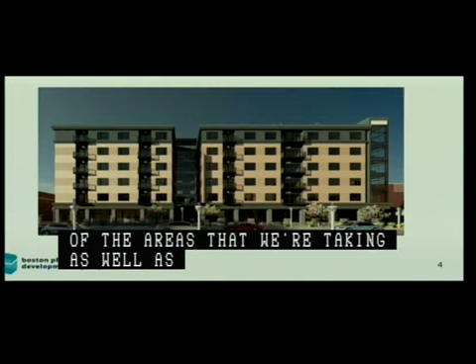Thank you. Okay, thank you, Michael. Are there any questions from the board?

There seemed to be a lot of opposition from nearby condo owners. Can you show us that building? I apologize, what building? There was a lot of opposition from next door condo owners, do you have that? Is that the wrong project? Oh, is that the wrong project? Okay, never mind. I'll ask that again later.

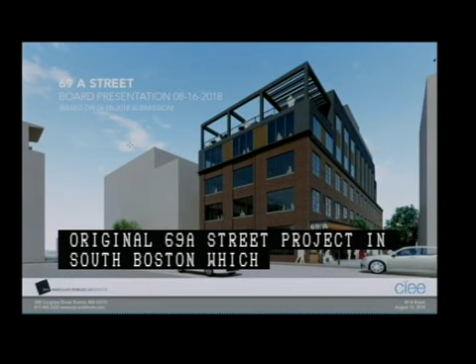The originally approved project consisted of the demolition of the existing two-story building in the rear of the project site and the renovation, expansion, and mixed-use conversion of the existing three-story brick and beam building fronting A Street. This renovation and expansion was set to include a three-story addition above the existing building and a six-story addition in the rear, for a total gross square footage of.

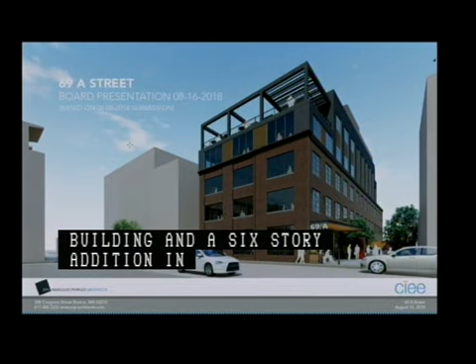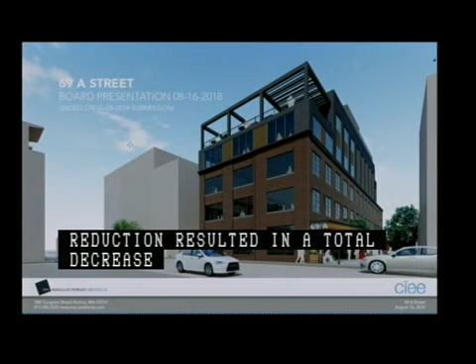78,700 square feet. The primary changes proposed to the originally approved project in the NPC submitted June 27th, 2018 include removal of the sixth story, resulting in a one-story reduction from the originally approved three-story addition, with a total corresponding height decrease from 66 feet 6 inches to 58 feet, as well as the removal of the originally approved rear addition to the existing 3-story building, which along with the height reduction resulted in a total decrease of 33,000 square feet, bringing the building total to approximately 45,700 square feet.

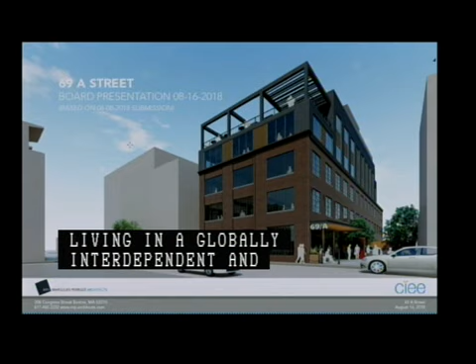The current proponent is CIEE, the Council on International Educational Exchange, and will serve as the Boston office for the nonprofit organization, whose mission is, quote, to help gain the understanding, acquire knowledge, and develop skills for living in a globally interdependent and culturally diverse world by bringing the world together through the most meaningful exchange programs available.

A public meeting was held at the Condon Community Center in South Boston and was supported by representatives from both the St. Vincent's and West Broadway neighborhood associations. We did receive some letters of concern from abutters at the recently constructed Port 45 building on 45 West 3rd Street, but given the reduction in height and square footage from the previous approval, this proposal would seem to be appropriate within the context of the neighborhood.

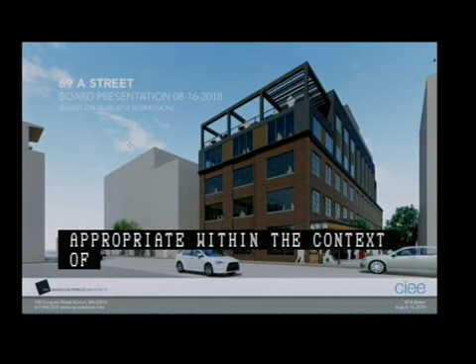I will now turn the presentation over to the development team, who can go through the specifics of the revised proposal, and then we'll be happy to answer any questions. Okay, thank you, Gary.

Good afternoon, Mr. Chairman, members of the board, Madam Secretary, Director Golden. Attorney Joe Hanley, McDermott, Quilty, and Miller. With me on behalf of the development team is Nate Turner, who is the project architect with Margulies Peruzzi Architects. He'll take you through the final design here.

In summary, we are here representing CIEE, who is the end user and is looking to open their Boston headquarters at this location. This is the former Standard Rivet Company industrial building in South Boston, and my client purchased the development rights as approved, and essentially what you have is an approved project that's been redesigned with a lower building height, without a rear addition, and with the same amount of parking.

What was it originally approved for? The original approval was for a 3-story addition and to take the rear of the building with a rear extension that was also the similar height. So we're foregoing the extension at the back and just renovating the existing building with a 2-story addition.

But is the use being changed, the use of the building? Use is the same.

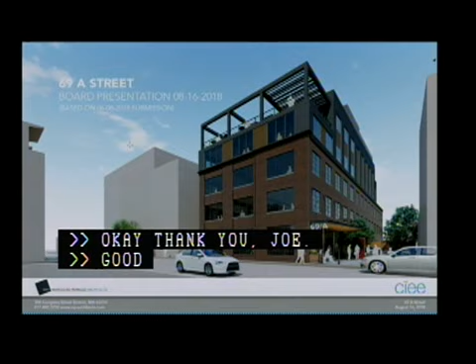Good afternoon, everyone. Here you're seeing the street view from A Street looking towards the building. You'll see replacement windows and a roof terrace in the front. We're maintaining the facade proportions along the front but trying to tuck back the terrace. On the right-hand side at street level, there's a more inviting entryway on the side of the building, pulling visitors and building occupants in off the sidewalk.

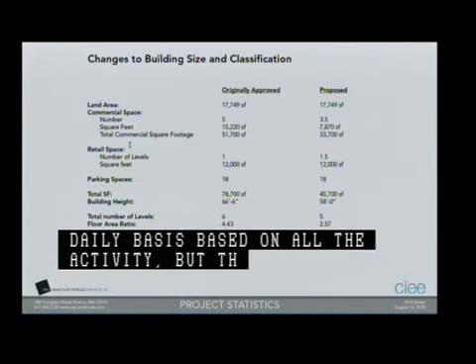Here's a comparison slide showing the statistics involved with the original submission compared to what we're proposing on the right-hand side. You'll see that pretty much all of our numbers are less than the previous submission in terms of height and square footage.

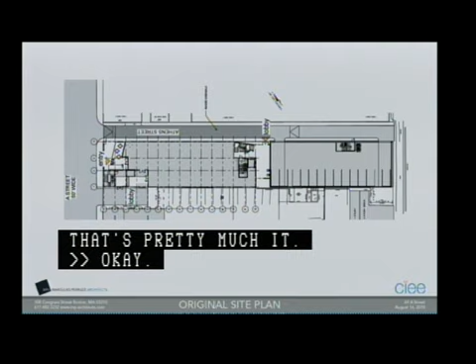Are there any questions from the board? So there seemed to be a lot of opposition from the nearby condo owners. Can you talk about that, please? Yeah, it's interesting. Thank you.

The comments you received are maybe predicated on this being another bite at the apple on concern about height and density of a project that's already been approved and is in fact now being reduced from what was approved in height. These are residents from 45 West 3rd, which was approved for development by this board with lots of interest from the abutters. Many of the folks on that IAG supported this development in 2016 because of the office use and the way the development was presented at that time.

We certainly appreciate the new residents who have since bought in that condominium project after we were approved, and we're happy to work with them in any way. But what you have before you, and in your supportive comments for this hearing, are letters of support from both the St. Vincent Neighborhood Association and the West Broadway Neighborhood Association, both for the lower end in this area. That opposition is sort of limited to something that came before them. But having said that, we're always happy to work with our neighbors.

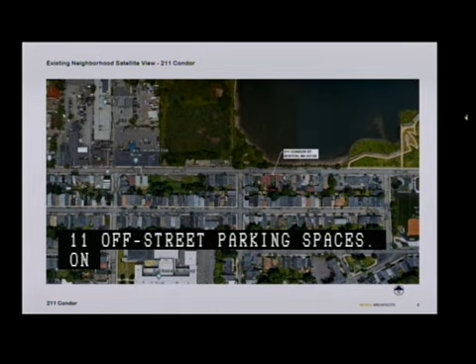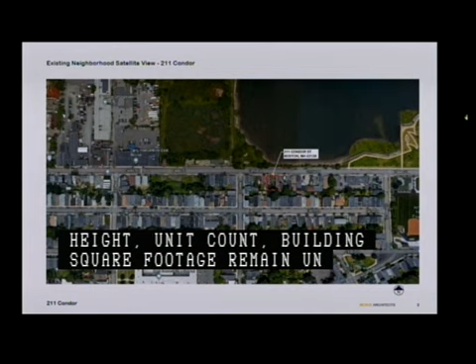The building at 211 Condor Street was most recently revised and approved by this board in January 2018 as a 4-story residential building with 12 residential units and 11 off-street parking spaces. On March 6, 2018, 211 Condor Street LLC acquired the property from Boston Real Estate Capital, the original proponent, and on June 26, 2018 submitted a revised plan to the BPDA seeking to redesign the exterior facade and reduce the off-street parking by 1 space. All other aspects of the project, including building height, unit count, and building square footage, remain unchanged.

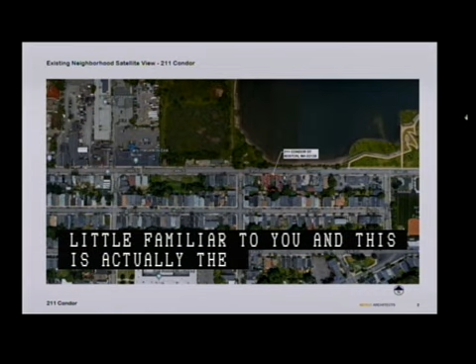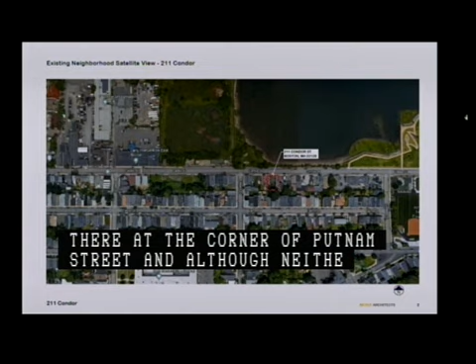This project probably feels a little familiar to you—this is actually the 4th time we've been before you on what started as a relatively simple project, but because of its location, here's that 7-acre parcel you were considering earlier. 211, which we're here on today, is here. The other component of this project is 187 Condor, at the corner of Putnam Street. Although neither building independently would have been subject to small project review, the BPDA requested that my client voluntarily submit to small project review because of all the other things happening on Condor Street, so they did.

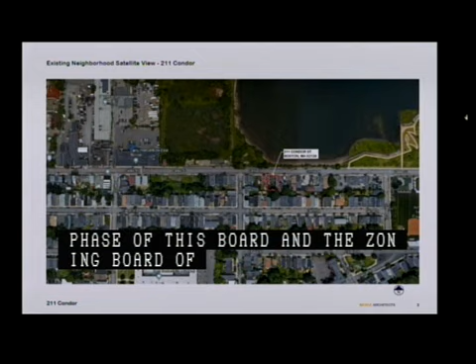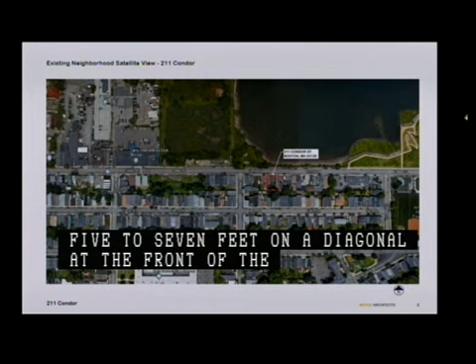After this board's original approval in June of 2017, 211 Condor Street was the subject of the first notice of project change. After the initial approval at this board and the Zoning Board of Appeal, it was discovered that the zoning subdistrict line running down Condor Street was not coextensive with the Chapter 91 Tidelands line, which cuts across the front of some buildings on Condor Street. So we appeared before you in January of this year seeking a reduction of 5 to 7 feet on a diagonal at the front of the building to comply with Chapter 91 and set aside that space as either open space or marine water-dependent use. Because we're across the street from the Chelsea River, we're not able to do a water-dependent use, so the front of the building would be open space. As a result of that 5 to 7 foot reduction on the front of the building, we lost 2 units and 1,600 square feet of space.

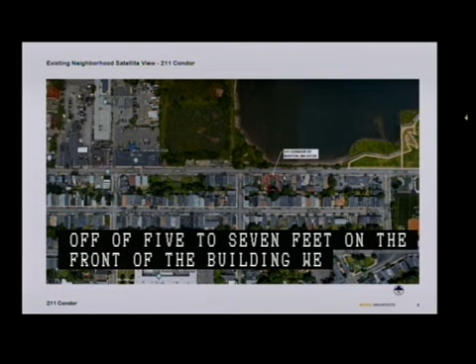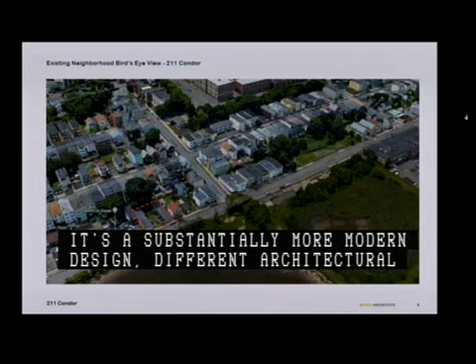Rather than just shoehorn the original design into the building as cut off, the new owner of the project, Wonder Group, decided to redesign both 187 Condor Street and 211 Condor Street. We appeared before you earlier this year on a complete redesign of 187 Condor Street, which you approved. It's a substantially more modern design, different architectural firm, different concept, and different idea of taking in the views of the Chelsea River across the street. So similarly, today before you is solely a consideration of revised design for this project.

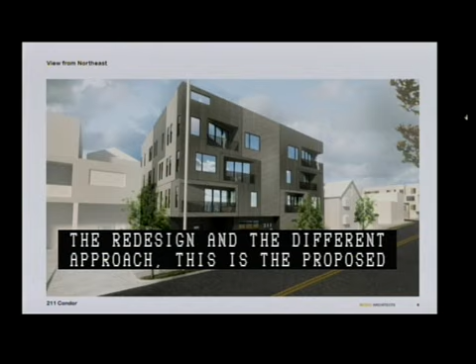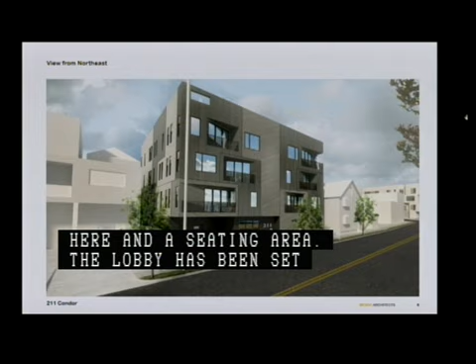Significantly, the architect has added outdoor balconies for each of the front units, creating usable open space for all residents at the front of the building and activating it, making it more lively along Condor Street. As a result of the reduction on the diagonal, we've picked up some nice open space in the front where there'll be a planter and a seating area. The lobby has been set back for the residential entrance, and there is the entrance to the parking garage, which has space for 10 vehicles. Also, the top floor has 4 units, each with a small roof deck for more usable open space.

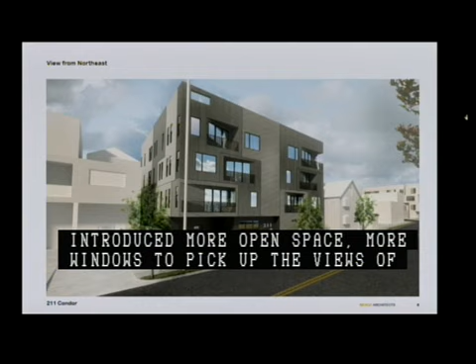So we've introduced more open space, more windows to pick up the views of the Chelsea River across the street, and softer building materials in response to comments we heard from the neighborhood when we redesigned 187 Condor Street. They wanted to see more traditional materials, so we've added wood to the front of the building, in addition to the glass.

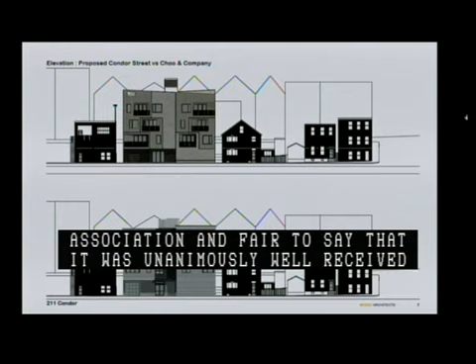We had a community meeting sponsored by the BPDA. We met with the Eagle Hill Civic Association, and it's fair to say it was unanimously well received. The architect has taken the original massing of the building, which was 3 bays across the front, and essentially replicated the same massing, same height, same building envelope—but for the reduction at the front—introducing a much more contemporary design.

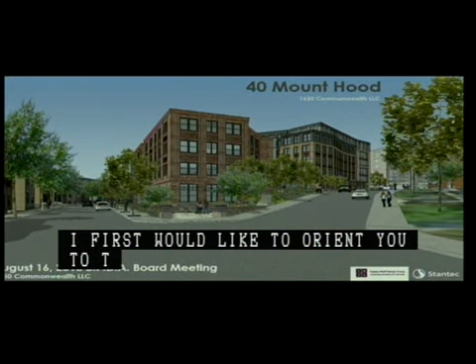Thank you, Mr. Chairman, members of the board, Madam Secretary. I'd first like to orient you to the project's location. Cleveland Circle is in this direction, downtown, and Packard's Corner is in this direction. The site is here. It is currently the Boston Hotel, formerly the Best Western Hotel. Those of you who know it are familiar that it also is in proximity to the Green Line that runs along Commonwealth Avenue.

Off of the project site location, off of Mount Hood Road, the project consists of approximately 165,310 gross square feet of a combined 4 to 6 story residential building constructed on a podium, containing up to 151 condominium units and 204 parking spaces — just for the record, I think your paper had 201, but it's 204, you'll see that in the plan. The proposed project unit mix consists of 6 studios, 88 one-bedrooms, 41 two-bedrooms, and 16 three-bedrooms. Of the 16 three-bedrooms, 10 of them are townhouses.

BPDA staff recommends that the board take the following actions: authorize the director to issue a scoping determination waiving further review, authorize the director to issue a certification of compliance, authorize the director to enter and execute a cooperation agreement, a Boston Residents Construction Employment Plan, a community benefits agreement, and an affordable housing IDP affordable housing agreement, and any other agreements needed for this project.

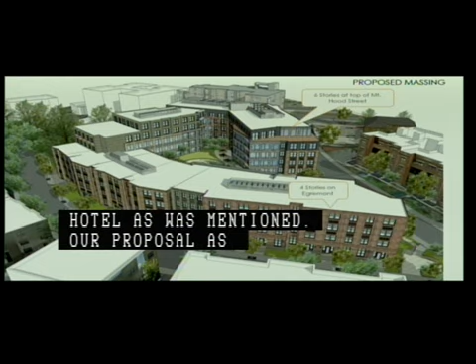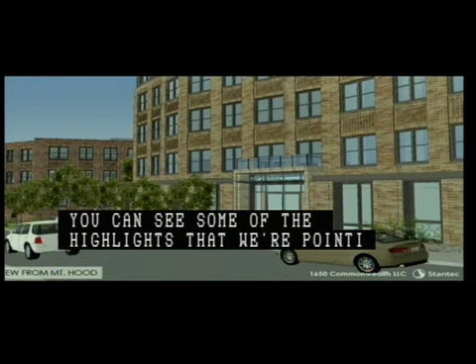Our proposal is, as was said, 150 for-sale housing units with 24 IDP units, which is 16%. As you can see, we worked hard with both the BCDC and the Aberdeen Architectural Historic Commission to design a building that fits into the community. You can see some of the highlights here - down at the street level, a highly detailed brick building with some diversity in the colors that we picked up from neighborhood precedents. This is the corner of Mount Hood and Egremont.

That's it - any questions, please? Okay, thank you. Are there any questions from the board?

Can you just go back to the slide that showed the different amenities around the building and just talk through them? Sure. So I'll point out something about each slide.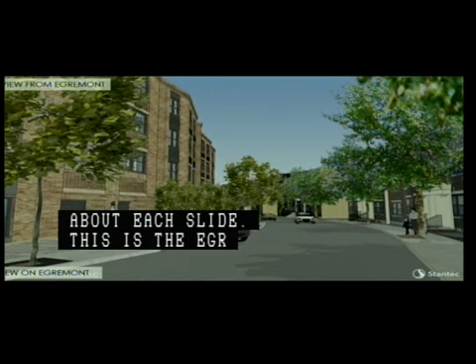This is the Egremont side, and this is the entrance to the lower level of the parking structure. These units above are what I would call the liner units. So this is the entirety of what you can see from the street in terms of the garage. That's an amenity - using the facade of the buildings to block the view of the garage so we don't see it from the neighborhood. As we go back - oops, sorry, I'm going the wrong direction, excuse me.

These are stoops along Egremont to try to make it a nice neighborhood feel. If I were to show you a picture of the other side of the street, you would see stoops up into walk-up buildings similar to this. So there you go, you see it on that side and you see the stoops.

As we move back up, you can see the topography in this building, and how we've stepped the massing down the hill. This amenity here, there's a doorway into that glassy part between those two buildings. The developer has said to the community that they will allow the community to potentially use that space for community meetings from time to time, coordinated with the property manager. This is the entrance along Mount Hood, which would enter into the lobby and other amenity spaces there.

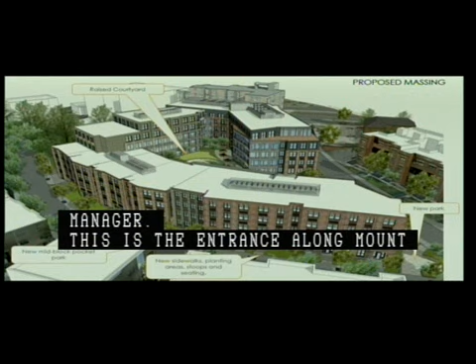And then that's the overall. Does that answer your question? Yes, thank you. Thank you.

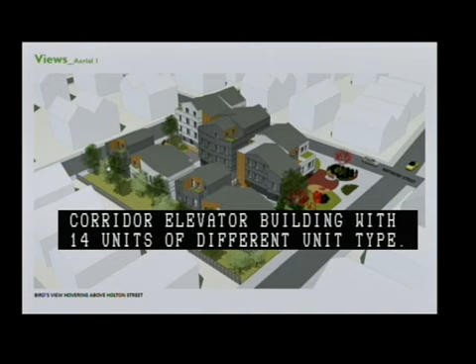This is an aerial view of the project. It basically comprises 3 building clusters. The main building is a double-loaded corridor elevator building with 14 units of different unit types, as well as 2 carriage houses along Litchfield Street for neighbors. The parking is tucked under the building overhang, so it's hidden away from public view. There's a generous buffer zone between the neighbors, as well as a publicly accessible pocket park at the corner of Holton and Antwerp Street.

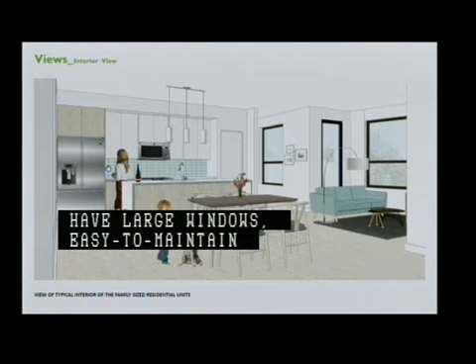The units will have large windows, easy to maintain flooring, fresh air through the ERV system, as well as a large kitchen for the family-sized units, as well as other sustainable features.

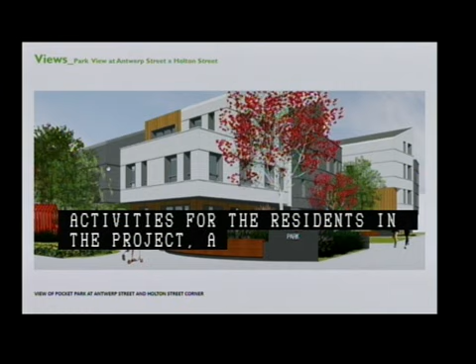The jewel of the project is the pocket park. It will be publicly accessible with design features like a play sculpture, seating areas, and a sun lawn. We envision that as a passive-use pocket park that will activate neighborly activities for the residents in the project, as well as the surrounding streets. The surrounding community can use it for Saturday yoga or Tai Chi lessons, summer cookouts, group or senior dancing lessons, or just a simple picnic with family and friends.

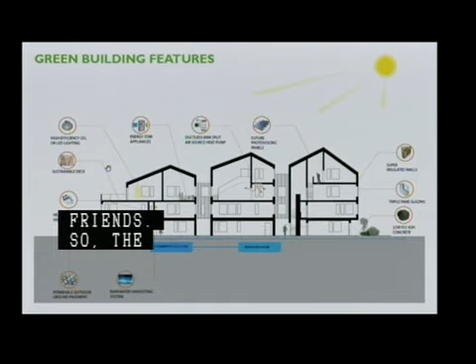The project will also be pursuing LEED Gold certifiable status, as well as a robust building envelope, efficient HVAC units, future PV panels, and other sustainable features. And that's the project. Thank you.

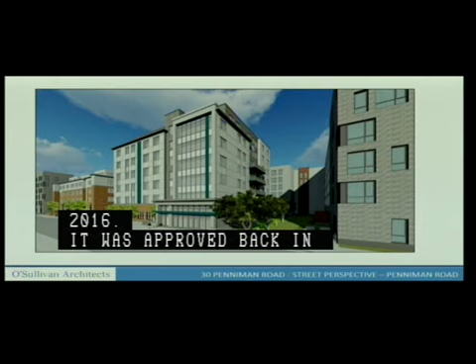Right next to the proposed building is a 36-unit residential condominium building. Construction on that started in 2016. It was approved back in 2008 and then purchased by my client from a prior developer. And those units, all but I think 2, have been put under agreement, and we're at CO at the moment. So not only are we working with Michaels, but my client also has new residents who were literally next door.

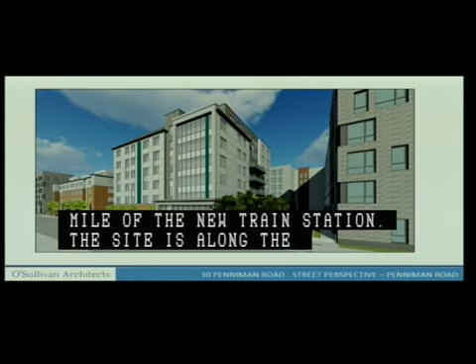So the opportunity here is, what's new, obviously, is Boston Landing, and we are right at the foot of Boston Landing within a quarter mile of the new train station. The site is along the Pike and between Cambridge Street and the Mass Pike beneath Union Square. And as Gary indicated, this is a further introduction of home ownership, which we are excited to provide and to add to what we've already started, and most importantly, to be part of an overall plan with the Michaels Company.

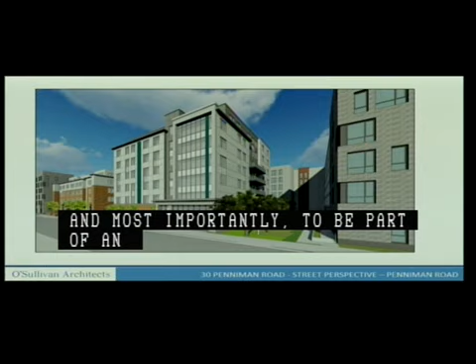This site itself includes a derelict building, which is there now, which has been essentially condemned by order of ISD and has been unoccupied by that order for some time. And so my client is coming in as the new owner developer of that with Michaels to provide much needed home ownership in a neighborhood that, as you know, has a disparity of rental to home ownership.

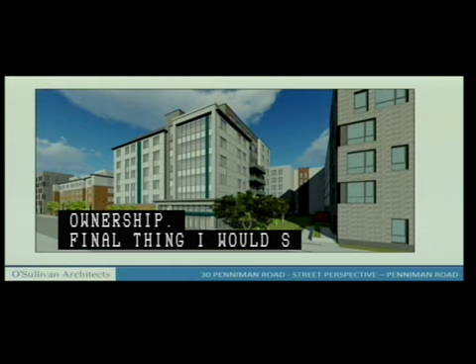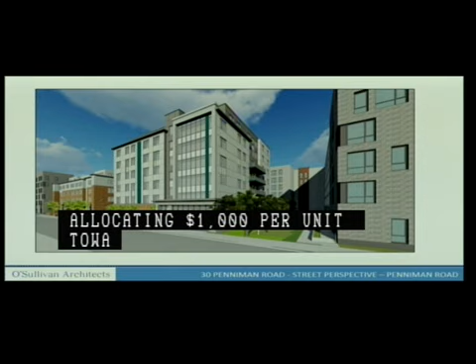Final thing I'll say, we have worked very hard to be stewards of the park. There's a small, not a pocket park, but it's sort of a pocket park. It's got a community garden and some basketball courts and a small pocket park area directly across the street, which we adopted on the first development. And you'll see in the board memo, this project is allocating $1,000 per unit towards that park for maintenance and upkeep. And that is on top of a few of the other developments in the area, as well as with the Michaels Company. So we see this as very much an opportunity to reconnect or connect this part of the neighborhood, which perhaps hasn't been readily available to folks, and then tie into the new train station in a responsible manner that supports the park.

So David O'Sullivan is our architect, and I'll ask him to go through the presentation for you. Thanks. Okay, thank you very much.

Thank you, David O'Sullivan. This is basically a view to the right is part of the Rugg Road, 40 Rugg Road. Our building in the center, the 36-unit condominium, is to the left.

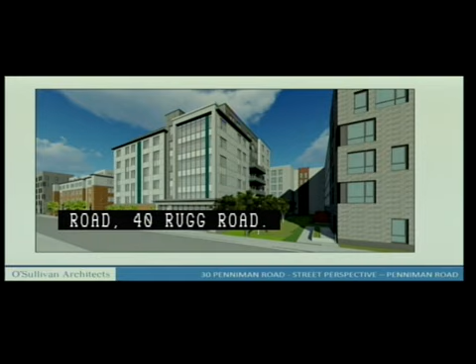Where do I have to zoom it? Should I?

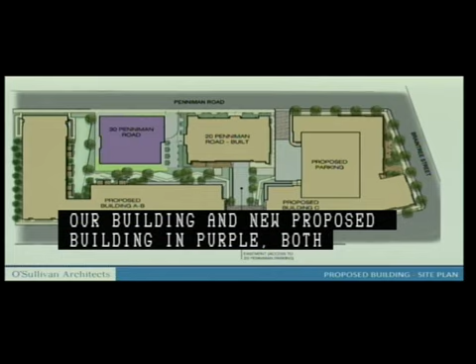This is the overall block, showing our building and the new proposed building in purple. The Penniman Road Park is across the street from us. The U-shape around it is the Michaels 40 Rugg, and next to it is the condominium building. We'll be coming in for an entrance drive right between the two condominium buildings.

This slide you saw before. This is a view from the other side with that drive in between the two on Penniman Road. Our entrance is on the far side of the building.

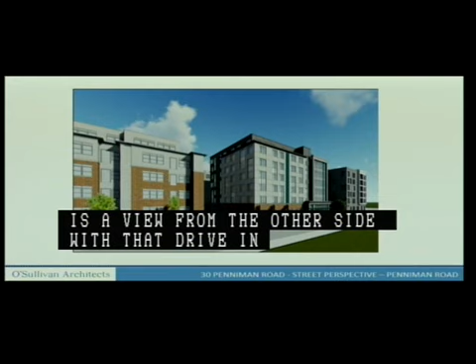On the courtyard between us and the 40 Rugg development, we have two direct access loft-style units that face the courtyard. The other 44 units in the building are all internal.

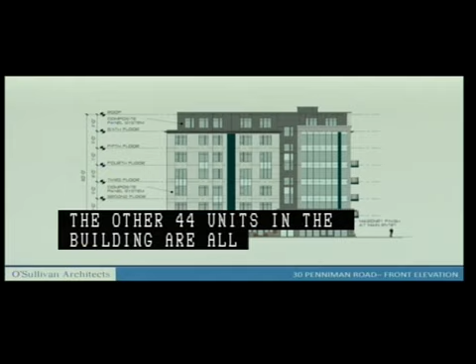Street facade with lobby, bike parking, and access in the front. Basically the side facing Michaels has balconies that look towards the green space between the buildings.

The back on the top floor has an amenity space and a small common roof deck up top. This amenity space is planned there because it has the best views all the way around, and it's a little bit taller than the buildings adjacent to it, so you get a nice view.

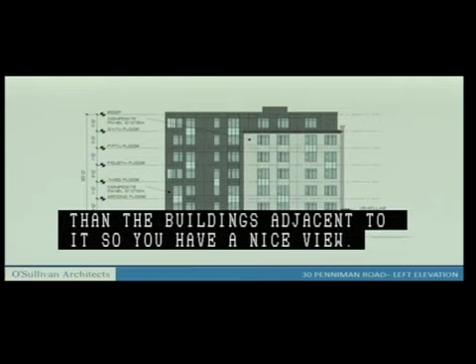And then the side that faces our existing 20 Penniman has the garage door on the side there. And that's basically what we are.

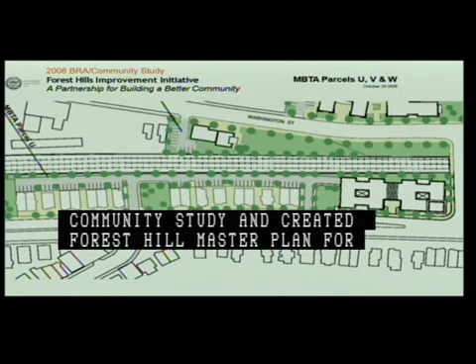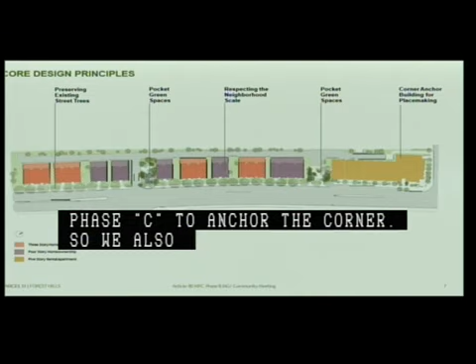The development was divided into 3 phases. Phase C was transferred to The Community Builders, and Urbanica is the developer for Phase A and Phase B. Back in 2008, BPDA conducted a thorough community study and created the Forest Hills master plan for Parcels U, V, and W. The primary concept for Parcel U was to create buildings of smaller footprint in the middle of the street to correspond to the existing fabric, and to create an anchor building at the corner. Urbanica's plan adopted the essence of the community study: we proposed 3- and 4-story townhouses at Phase A and B to match the neighborhood scale, with a larger building at Phase C to anchor the corner. We also tried to create a greener living environment by preserving existing trees and adding 2 pocket parks.

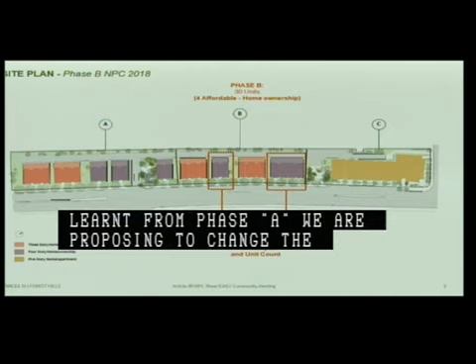At this time, Phase A has been completed and Phase C is under construction. Based on marketing lessons learned from Phase A, we are proposing to change the internal layout in 2 buildings of Phase B. The 3-bedroom duplex on the 3rd and 4th floors will be split into a 2-bedroom on the 3rd floor and a 1-bedroom on the 4th floor. 6 such duplexes will be converted into 12 flat units, changing the total unit count from 24 to 30. But other aspects of the project, such as total square footage, building height, and total room counts, will not be affected. In addition, we are increasing the number of IDP units from 3 to 4.

These are some diagrams showing how the internal layouts will be changed—this shows the 3rd floor, and this is the 4th floor. The proposed change will create more housing units and an additional IDP unit for Boston residents. We are also adding 1-bedroom and 2-bedroom units that are more affordable and underserved by the current market. From here, I'll quickly go through some images of the completed Phase A townhouses. We expect Phase B to have similar finishes and quality. That's it, thank you.

Thank you very much. Does that conclude your presentation? Yes. Are there any questions from the board? It's beautiful, thank you. If there's no questions, then a motion is in order. So moved. Second. All those in favor? Aye. Opposed? Ayes have it. Thank you, congratulations.

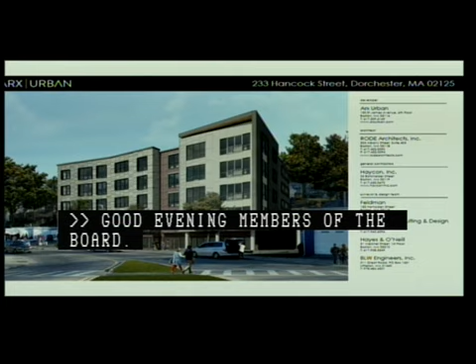Good evening, members of the board. My name is Benji Moll. I'm a principal of ARX Urban, a socially minded real estate development firm based out of Boston. I'll keep this short and sweet.

We're excited to be here tonight to let you know that we're adding 16 more income restricted units to this project. We received approval and vast support from the community to build a project at the intersection of Meeting House Hill, Jones Hill, and the Hancock Civic Association, right across from the future Dot Block site. Last year in October, we had over 20 meetings with the community, received letters of support from all of those neighborhood associations. Throughout that process, we really heard two things. The first is that they wanted something else besides these blighted auto body shops.

The second is they wanted as much income restricted units as possible. So over the course of the last 18 months, we've worked through various funding sources to be able to restrict more units than the 5 that would have been required under the IDP requirements. So the changes basically are increasing the number of units from 5 to 21 that are income restricted. 10 units will now be restricted at 80% of AMI, and 11 units at 100% of AMI. We're hopeful that this model of development, where we're able to pull together various sources of social impact funding and private capital, will lead to a new method and way of building mixed income housing around the city.

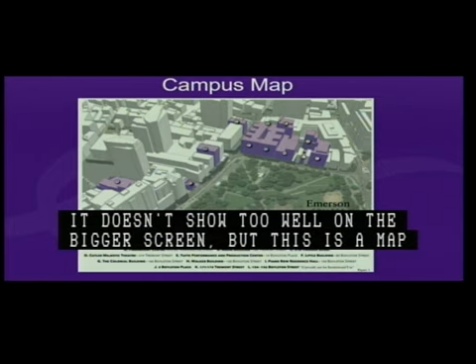This is our campus map. It doesn't show too well on the bigger screen, but this is the map that shows the 171, 172 Tremont Street building. There is a building up there that looks like it has a purple stripe on it on Boylston Street. That is a building I want to mention that the college did purchase. We will not be utilizing it right now; we're going to keep it as is until at some point we need to use it. So it'll stay on the tax rolls, and it'll be operated as a residence, which it is, with commercial space on the first floor.

These are just a few of our schools: the School of the Arts, which offers a BA and BFA in some programs; Communication Sciences and Disorders, a very little known program, but one that started the school in the beginning — it was an oratorical school, actually; Communication Studies, Journalism, Marketing Communications, Business of Creative Enterprises, some new programs like Comedic Arts, Performing Arts, Visual Arts, and Writing, Literature, and Publishing. Those are some programs people aren't even aware of.

We're here for an IMP amendment and an extension and renewal of our master plan, but I thought I'd bring you up to speed about some of the approval dates and outcomes.

Paramount Center was approved in July of 2006, and as you know, it's a very heavily used center. Colonial Residence Hall was approved in September of 2007, and the Colonial Theater has just reopened, so that's something we can all celebrate. 2 Boylston Place Residence Hall was approved in 2014 and opened this past fall. The Little Building Residence Hall was approved in May 2015, and 12 Hemingway Street in March of 2017.

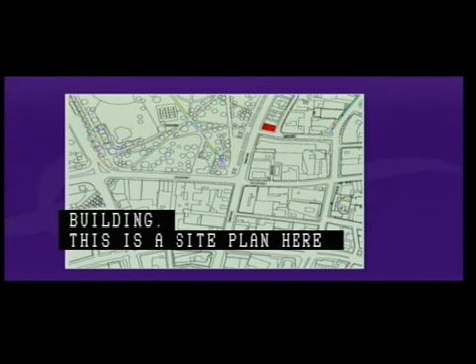I think that's it for that building. This is a site plan here of where it's located. I know you can't read that easily, but as you can see, it is on the corner of Avery and Tremont. These are the uses that I just mentioned that are going in there, and I look forward to your support.

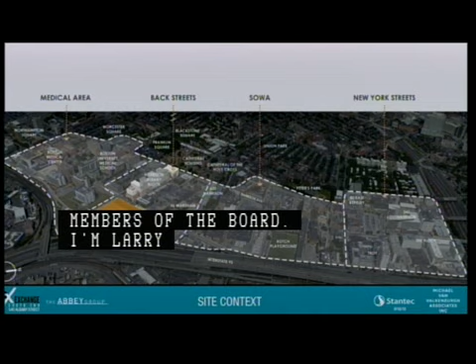Good evening, Mr. Chairman, members of the board. I'm Larry Grossman, a principal architect from Stantec. As you can see, there's been great dialogue with the community, with the city, and a lot of meetings to go to, but I think in this case it improved the project in many ways, and it was a very well run process.

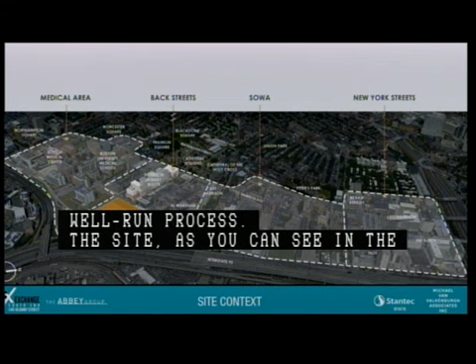The site, as you can see in the yellow area, is bounded by Albany Street on one side, the Southeast Expressway on the other, and the medical area to the west. It's a 5.6 acre parcel, and this is how it looks today and has looked for many, many years, as the Flower Exchange, a one-story industrial building. Interesting, the Flower Exchange was filled with plants, but there wasn't a single tree on the site. We're going to change that in a big way.

The site was almost entirely impervious, with a building in the middle of the site and parking all around.

So this is our vision for the project, a compilation of 4 buildings of varying heights that essentially create the edges for this public park, what we call Albany Green, as a public amenity, and essentially the front door onto Albany Street and the front door to 4 of these office buildings that will house retail at the ground floor, public uses, and office lab on the upper floors.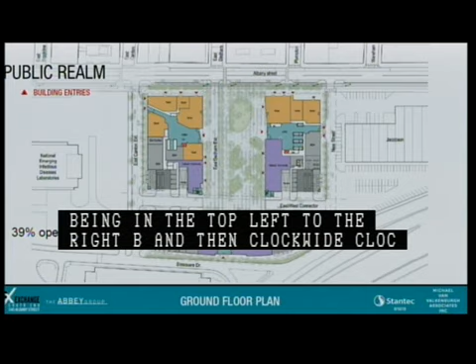This is the plan, the public realm, and we refer to the buildings as A, B, C, and D, with A being in the top left, to the right B, and then clockwise around C and D. So buildings A and B front directly on Albany Street, in addition to Albany Green. All those little red triangles are showing places that you can enter the buildings.

The building's very, very pervious. We have lobbies that face out onto Albany Green, in addition to some side lobbies to allow you to pass through the site. And we've even looked at the adjacent parcel, the Jacobson Flower Mart parcel, and have one of our lobbies in Building B connect to that, so that when that gets developed, when and if that gets developed, there's the potential to connect that into Albany Green.

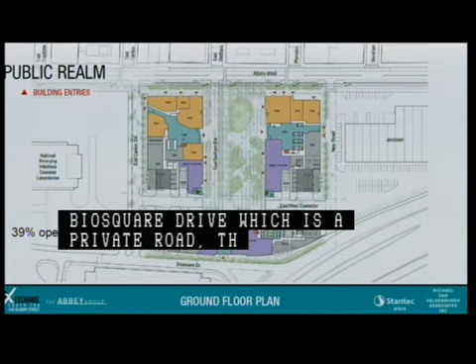The roadway network is essentially bounded on the 2 side streets. We extended East Canton down to Biosquare Drive, which is a private road, and then between our parcel and Jacobson, there's another access point. And we've extended an access with East Dedham, a roadway that runs through Albany Green and becomes a one-way in, providing access to the front doors of the site.

The other thing that was interesting about the site is that there's a large canal that had run, as you know, this was South Bay. This was a bay, and Albany Street was the edge.

I'll show you some of the things we think we're going to uncover when we begin construction. The water that was passing through was put into a culvert, and the road running east to west, which we call our east-west connector, we can't build on, so that became our service road. All of our truck docks and access to underground parking are located off of that location.

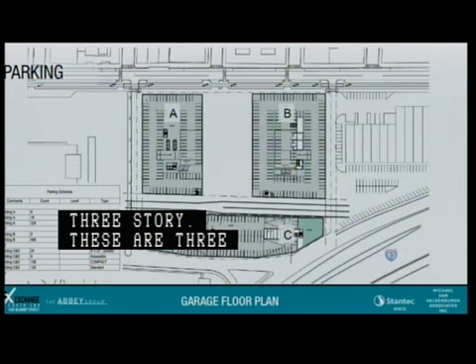Lastly, zoning calls for 20% open space, and we've been able to achieve 39%. This is a diagram of what's happening below grade with the 3-story structure. These are 3-level underground parking garages, one for each of the buildings A, B, C, and D, around 1,150 spaces.

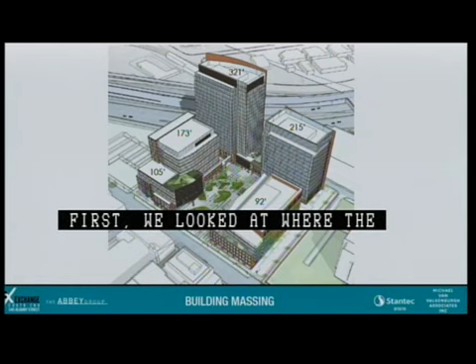This is a massing diagram showing what we came up with. One goal was we didn't want it to look like a monolithic campus, so we looked at breaking the buildings down in height and detail. But the first thing we did was look at the sun and where it would fall, because the park, Albany Green, was a central component of the project. We found we had to lower some of the buildings to allow the sun to penetrate and give enough sunlight onto the green.

It was a double benefit, because we wanted to lower the buildings along Albany Street to make that connection. Zoning stipulated 120 to 200 feet along Albany Street, but we dropped them down to 92 feet for one building, 105 for another, then stepping up.

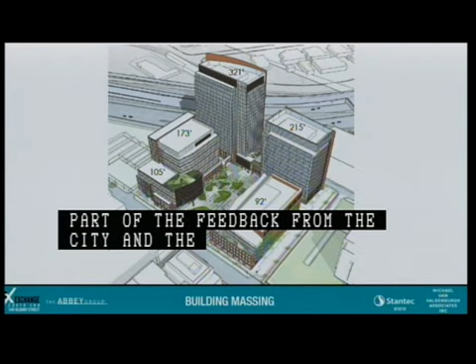Part of the process, we got feedback from the city and community that they endorsed putting more height on the highway. So we went back and got a zoning change, and in fact increased the allowable height. So the tallest building essentially mitigates between the south end and the expressway toward the back of the site, and that didn't have any impact on the sun hitting the park, which worked out quite well.

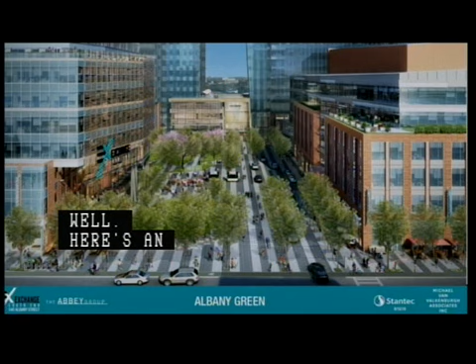Here's an elevated view. Albany Street is in the foreground. You're seeing building A on the right, B beyond. The kit of parts was that the buildings all varied in geometry and detailing, but there was a commonality of materiality. We wanted to relate to the south end, so instead of traditional brick, we used terracotta — similar tonality, but used in a more contemporary way. That's the orange colored material you're seeing.

And then as the buildings step up, they begin to step back. We have rooftop access and terraces.

When you enter here, you go left or right to the two individual cores, and that's on axis with the pedestrian promenade that runs into the project.

Building B beyond does the same thing, where the buildings along Albany Street are of different scales and massing. This was feedback we got through the process that I think was very helpful in improving the overall design of the project.

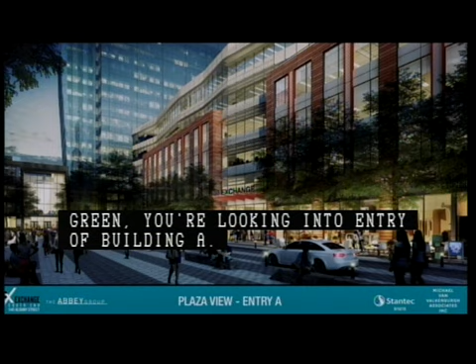Then down at eye level into Albany Green, you're looking at the entry into building A. All the lobby entrances focus on the green, with retail spaces at the base of the building, and you're seeing the lobby entrance on axis of buildings C and D beyond. Looking to the left, this is building B's lobby entrance.

One of the things we think we're going to find, because we know that when the Flower Exchange building was built, they hit a lot of the seawall, which were large granite blocks. They left as much in the ground as they could. It's expensive to take out. We know we're going to find a lot more.

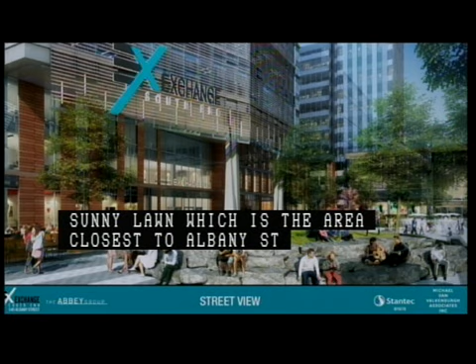So we're hoping to unearth some of this treasure and use that as a seat wall for what we're calling the sunny lawn, which is the area closest to Albany Street, which gets the most sun, but as a place to congregate, as a place to sit, as a place that people can just come and stop. We think there'll be a coffee shop at one of these Albany Street locations.

This is looking down Albany Street, a very gracious sidewalk, because we have a setback that gives us about a 15 to 18 foot sidewalk. We're envisioning retail uses with plenty of space for outdoor dining and replanting all those street trees. So here's a focus view of Albany Green.

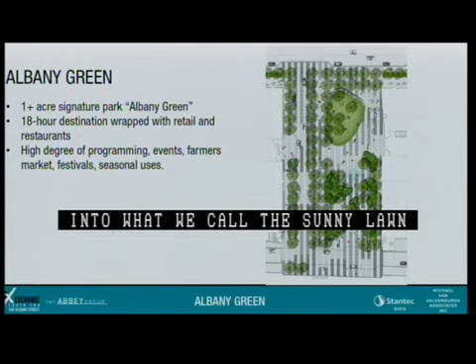Bill gave you the details, but the proponent is committed to programming this space for a whole range of uses, seasonal uses and festivals. It's essentially broken down into what we call the sunny lawn towards Albany Street, a more paved area for activities, and then what we're referring to as the quiet garden—a little more shady, a little more intimate, and a little further away from Albany Street.

And then these are views. Again, you're seeing this sunny lawn and the granite edge, the entrance to Building B, and some of the covered area.

This is an image of another project that the landscape architect had done as a precedent to what we think we can do with this granite block. We don't know exactly what we're going to find, so this is in some ways going to be an art project as we uncover this, but that's the goal we have.

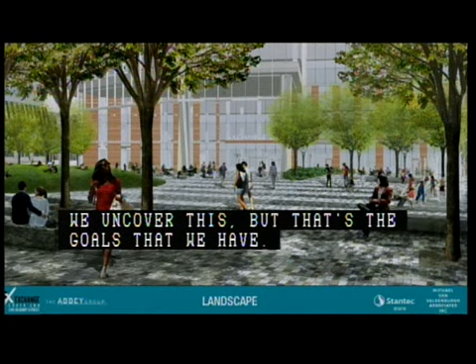This is looking across, standing at the lobby of Building A, looking to B. The center of the project has more hardscape than softscape, and we're hoping that this is what we can use to take advantage of for different programming events. In addition, we have a splash fountain in this plaza too.

And then further back on the site, in what we're calling the quiet garden, loose seating in and around, bermed planting, a whole range of planting types, really to create a canopy of trees to mitigate the overall height of the building.

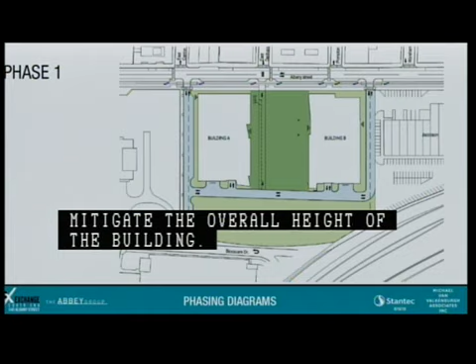And then Bill's going to talk a little about phasing. Well, so just about phasing, just to say that we're very eager to move forward with this work. And we believe that we can build this project speculatively.

We can get started with phase 1, which is the 2 smaller buildings up against Albany Street and the park, so that the public realm we're speaking of can be established and this connection to the neighborhood can be established, with phase 2 coming subsequently, meaning we could be beginning this work as early as late spring 2019.

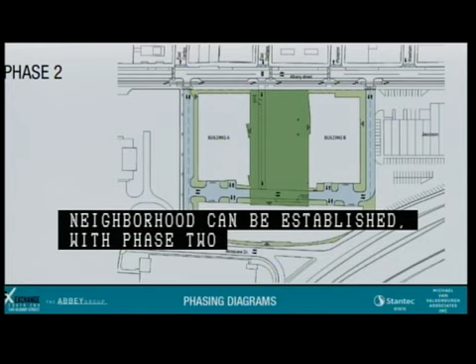And I believe that concludes our presentation on this. Okay, thank you very much.